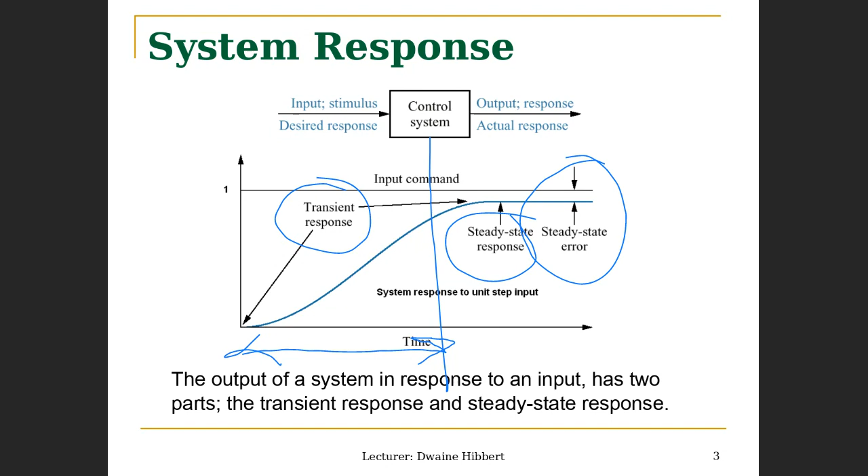Now, for us to appreciate and use system response, we have to understand that it is system response we use to describe the nature of a system. We describe the characteristics of that system based on how it will respond. We can use the model of the system to also characterize its response. So we can say, let us see how the system responds to a stimulus, and then from that response, we characterize it. Or we could look at its mathematical model, pick certain important parameters from that, and also characterize its behavior. So let us look, first of all, at the system response characteristics.

The performance characteristics of a control system are specified in terms of certain terms: the transient response terms and the steady state response terms. In particular, we look at the system response characteristics in terms of the response to a unit step input.

Yes, so all of these terms that we look at, we are looking at the system response specifically due to a unit step input.

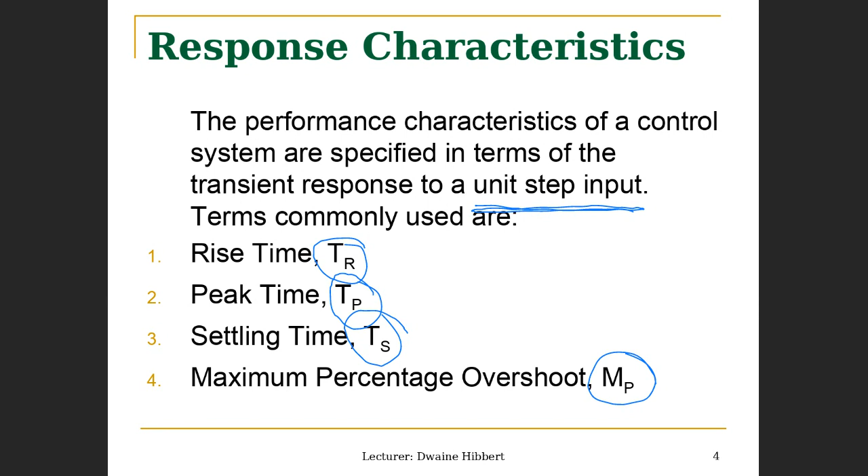Now let's define these terms. Start out with the rise time. Rise time is the time required for the response to move or rise from 10% to 90% of what we call steady state. In other words, that difference in time between the 10% and the 90% point of the journey to steady state is the term that is often described and used for the rise time.

Now, peak time, T subscript P, this is the time required for the response to reach the first peak of the overshoot, provided the system actually has an overshoot.

Now, for settling time, T subscript S, this is the time required for the response curve to reach and stay within a range about the final value. It is specified by an absolute percentage value, which could be 5% or 2%. Once it gets and stays within that percentage of the final value, we say it has settled. In some instances the value used is 5%, in other cases 2%.

In MATLAB, which you by now would be exposed to, when we derive step responses, MATLAB by default uses the 2% settling time. So that's the time it takes for the system to get within 2% of its final value and stay within that margin. That's the settling time.

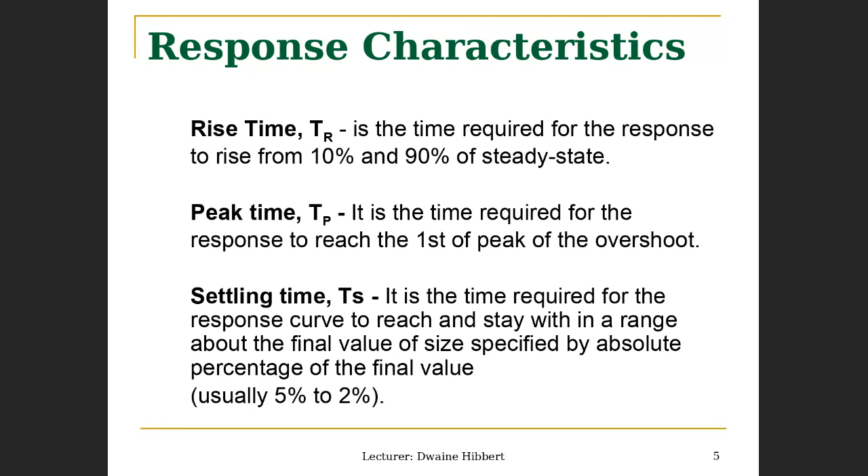Maximum percentage overshoot, M subscript P, this is the maximum peak value of the response curve, measured from the steady state value, and it is expressed as a percentage of the steady state value. How much did you exceed your steady state value? That is basically what we're saying, the maximum overshoot - the maximum point at which the system response went above the steady state value.

We're going to look at these terms - peak time, rise time, settling time, and so forth - in terms of two types of system response. We're going to start with the response of the first order system. What you're going to find is that the response of first order systems has a consistent shape, though it may vary slightly.

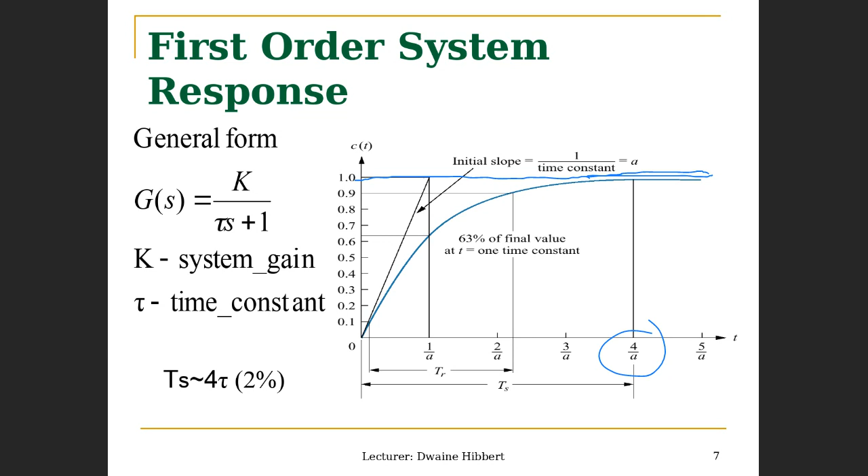So let's start with the rise time. The rise time here is defined between 10% and 90% of the final point. We're talking about the time between the two lower and upper limits. That's the rise time.

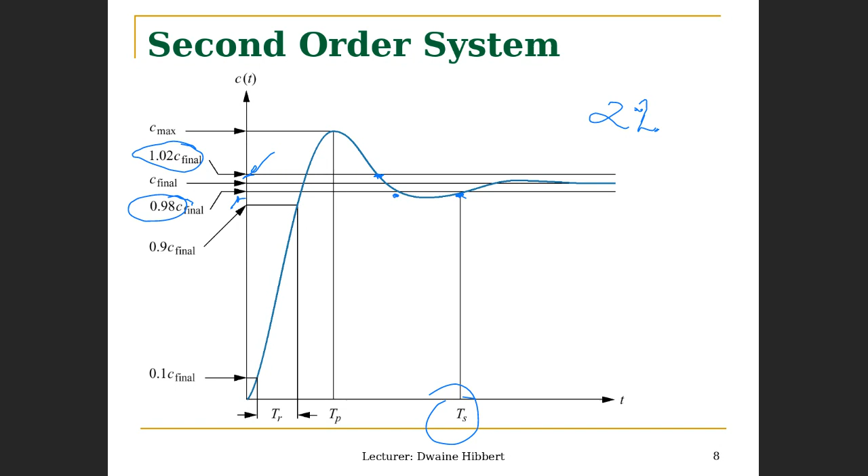Okay, go ahead with your question, Adams. I see your hand raised, Adams. Go ahead with your question. All right, we're not hearing Adams, so we're going to continue.

And the peak time is defined as pi over omega n times the root of 1 minus zeta squared. So these are just some of the formulas associated with the characteristic terms for a second order system.

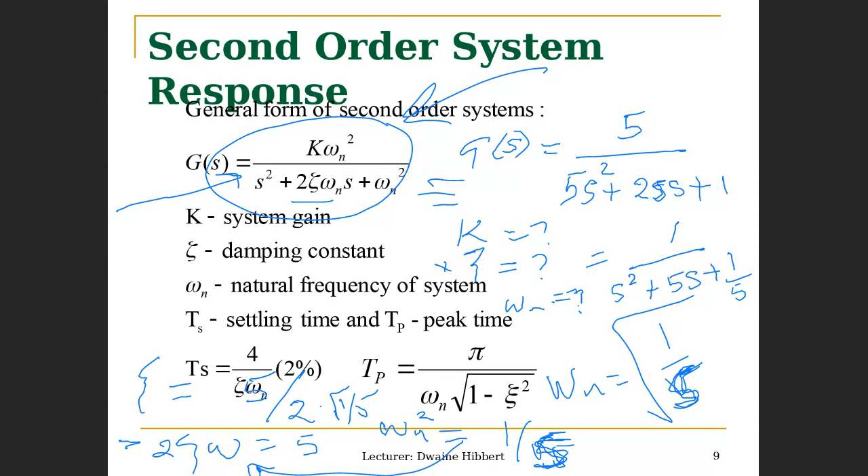So if you were now to determine the settling time, you would need to take that function and extract the terms of zeta and omega n. Then you'd be able to determine the settling time without actually seeing the actual response of the system.

We can do the same thing for the peak time. We could determine the peak time as well just by looking at the transfer function and extracting the pertinent or relevant coefficients or terms.

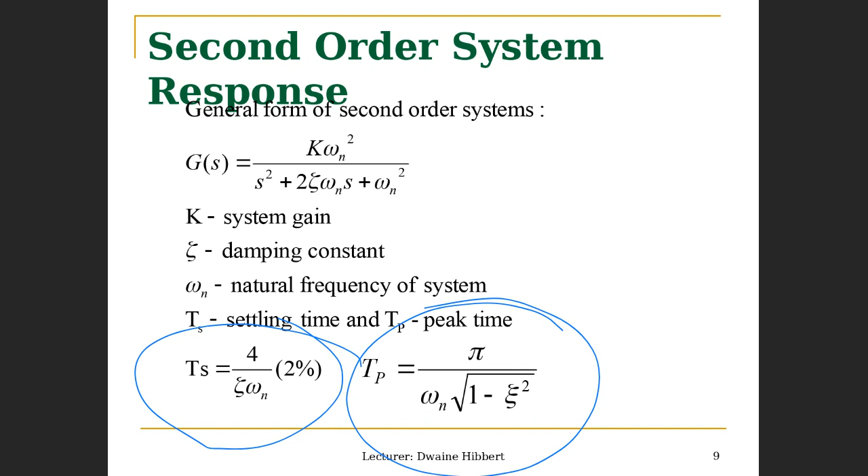All right, so let's continue. We're now moving on to system response, and we're trying to tie that into the whole reason for wanting to get a system response. Remember, we're talking about using models and simulation software.

Three important design objectives. Once you're going to design a control system, here are the three fundamental objectives that need to be met.

One, you need to produce a response that has minimum transient duration. You want to produce a desired transient response. That's the whole story. In summary, it shouldn't take forever; it should do so in the minimum time possible. That's what we call acceptable transient response.

Secondly, we want the system to settle with minimum error. We want to reduce steady state error to zero if possible. Now, in reality, it never ever goes to zero, it's as close as possible. So we would have our error maintained at the minimum possible, or the minimum suitable for the situation.

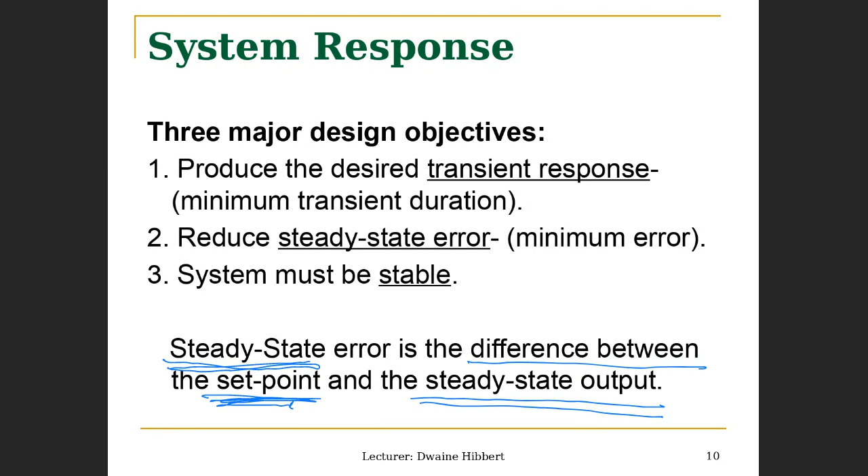So let's look at steady state error. We would have seen steady state error in that first response plot, which you may not remember, but that's fine. Steady state error is the difference between set point, where you desire or command the system to go, and where it actually goes, the steady state output. I should have a plot here to show that, but not yet.

A control system should respond to the input command. Remember, when you give the system a command, it should respond. The system should respond to an input, or respond to a disturbance. Remember, when you have a closed loop system, it should work to keep the controlled variable or output as close as possible to the set point.

So if it's maintaining the set point, let's say for argument's sake you're controlling a drone, and the drone is hovering, and you set it to hover at 100 feet above sea level, for argument, to keep it simple. That is what you set the set point to be. Now, if a gust of wind should disturb the drone, what would you expect?

Well, if it's a closed loop system... I'd expect the drone to return to its original position, or do the calculations to return to its original position. Yeah, it should attempt to do so, at minimum attempt to recover its original position. That's correct. So the drone should recognize that it's been disturbed from its desired position, and should now seek to regain that original set point. So it's responding not due to a new input command, but responding to a disturbance.

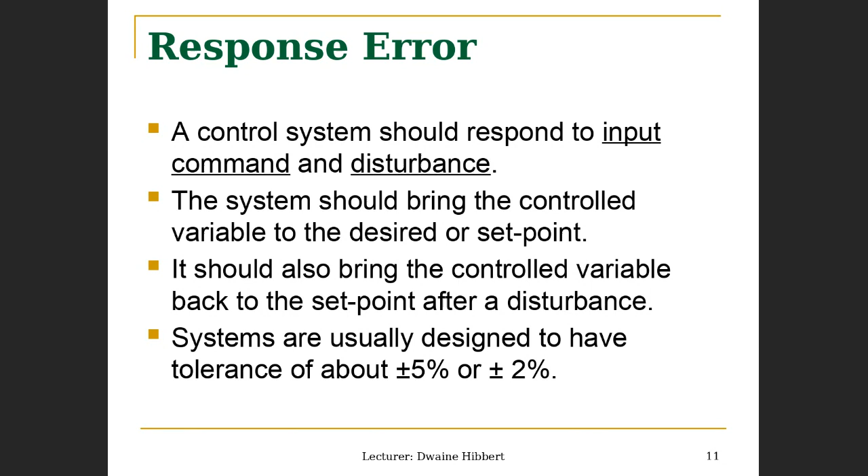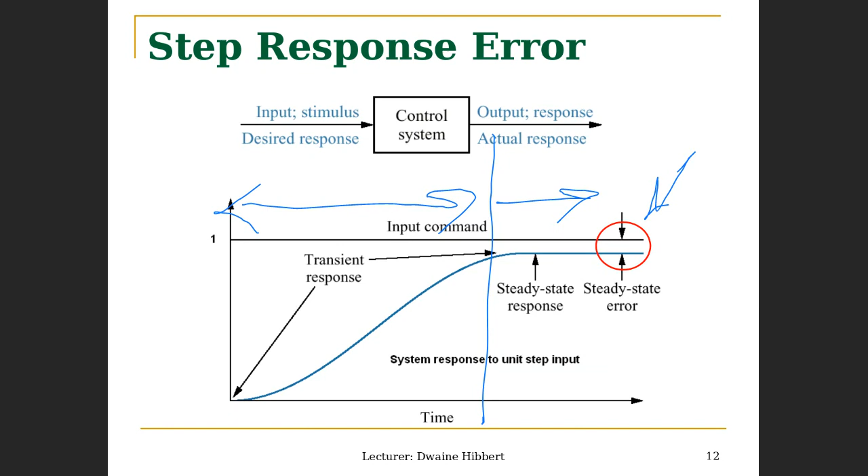We're now going to take a look at two important terms that help us to understand the behavior of control systems. Very important terms, and the terms you're going to look at are poles and zeros. Now we're going to define the term poles and zeros right now.

So the poles of a transfer function are the values of the Laplace transform variable s that cause the transfer function to become infinite. So any value of s that you can find, when you actually put it or substitute it in the transfer function, in so doing, if the system tends to infinity...

...then we refer to that value of s as a pole of the system. Now, for zeros, the zeros of a transfer function are the values of the Laplace transform variable s that cause the transfer function to become zero. Therefore, any value of s that you can find, that when you substitute that value into the transfer function becomes zero, then we refer to that value of s as a zero of the system.

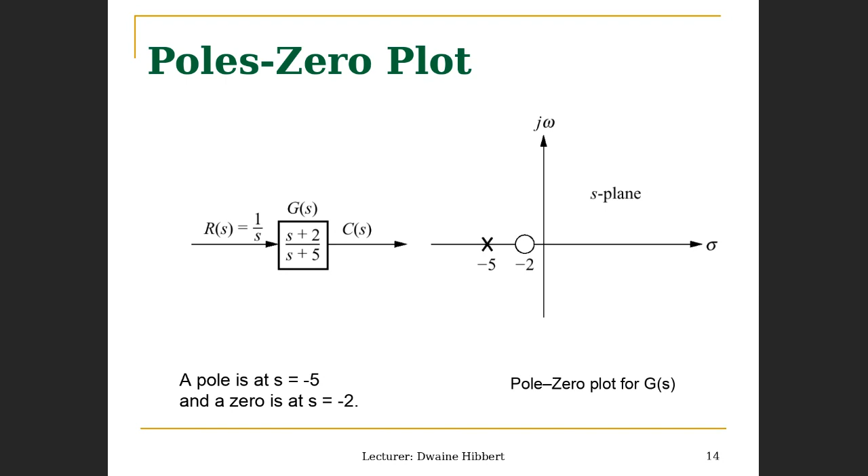Now let's discuss stability. We discussed stability in the first instance as being one of the design objectives. There are three design objectives: one, the system needs to respond timely; two, it needs to have minimum error; and third, it needs to be stable. If the system is not stable, you can't achieve that, to be frank.

So let's look at a simple definition for stability. A system is stable if a bounded input results in a bounded output. It's called BIBO stability - bounded input, bounded output. In other words, if you apply a finite input signal to your system, the system should respond with a finite output signal. If it does that, then the system is stable.

But you might ask, then how can you ever have an infinite output response? That's a very relevant question. But what we're going to see is that if the system tends or wants to attain infinity, then we define it as being infinite. We're going to see examples, a situation where the system is unstable, and you're going to see the system wanting to become as large as possibly can.

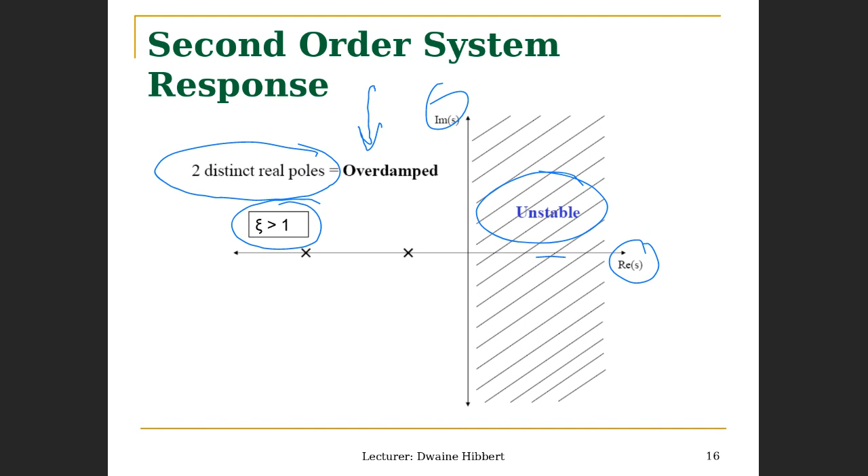So we've looked at two scenarios with distinct real poles only, where the system is overdamped, and the case where both poles are repeated with only real parts, so the system is critically damped and zeta equals 1.

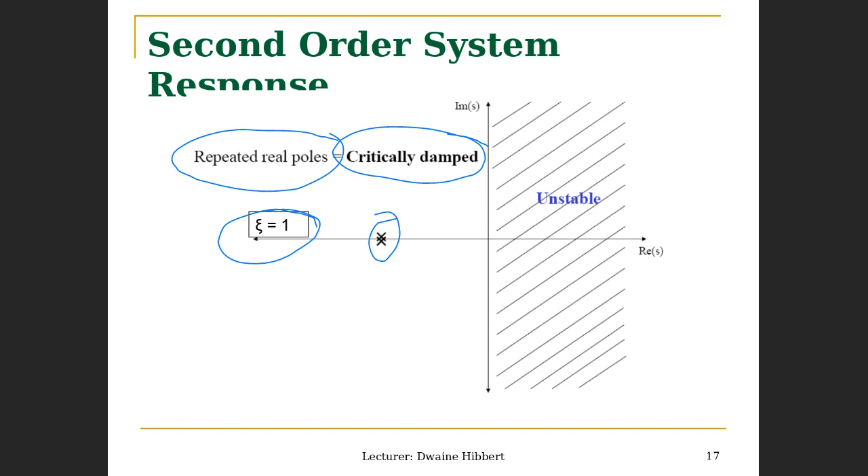So when we have poles with negative real parts that are complex poles, the system is termed underdamped.

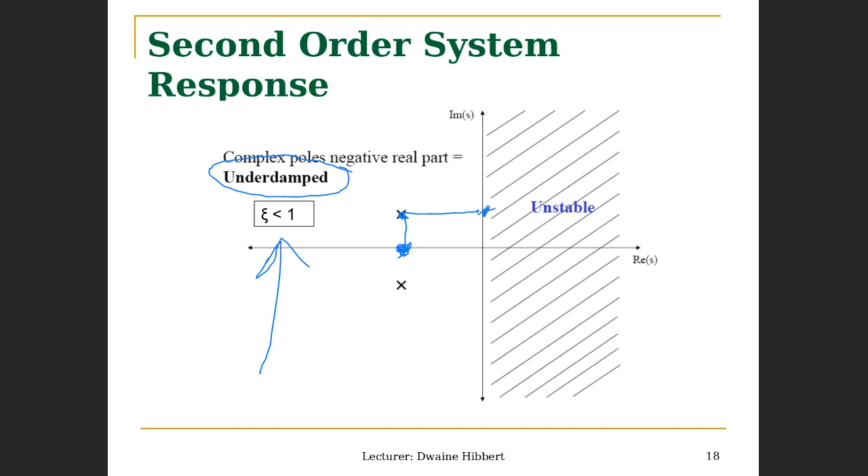Let's look at what happens when the system is underdamped in terms of the damping ratio: the damping is less than 1. As the damping goes down, the system becomes less damped, and we're going to see what happens to a system that becomes less damped. So we've just looked at three possible scenarios for a second order system: overdamped, critically damped, and underdamped.

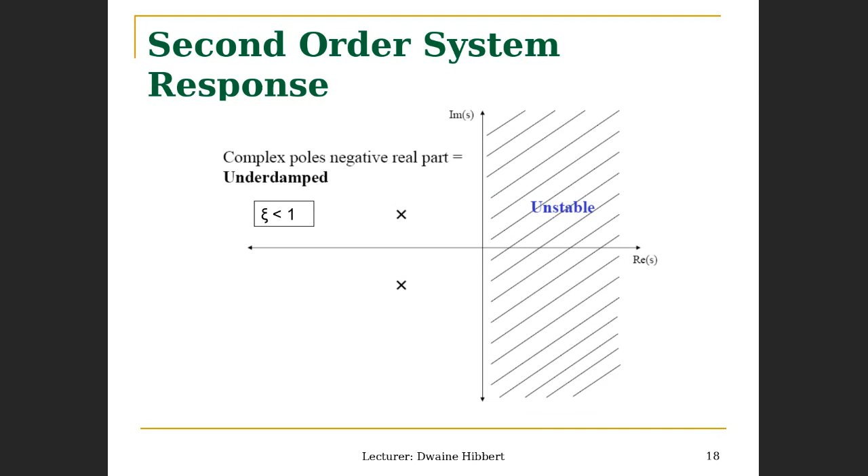So let's continue. Oh, my thing just went here. If my slide advances... all right, this... just confirm that you're still hearing me. Yes, sir, all right, so my slide decided to stay on this one. Yes, sir, all right, thank you. All right, I need my slide to advance. All right, so not doing it that way. I am going to do something because it's not advancing here. Let's come back to here. Really?

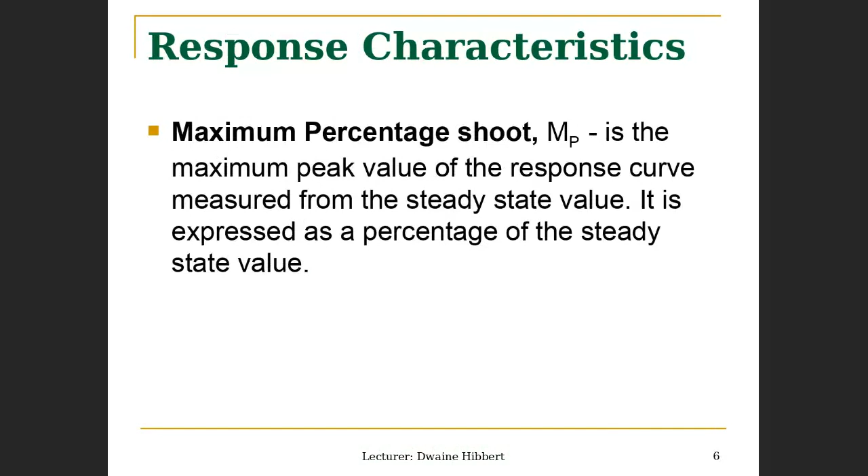Okay, so I lost my slide. I'm back here, all right, let's pick this back up. So, are we all good? Are you still hearing me? I see my slides back up now. Yes, sir. Good, so let's go back to where things got frozen, or just before that. All right.

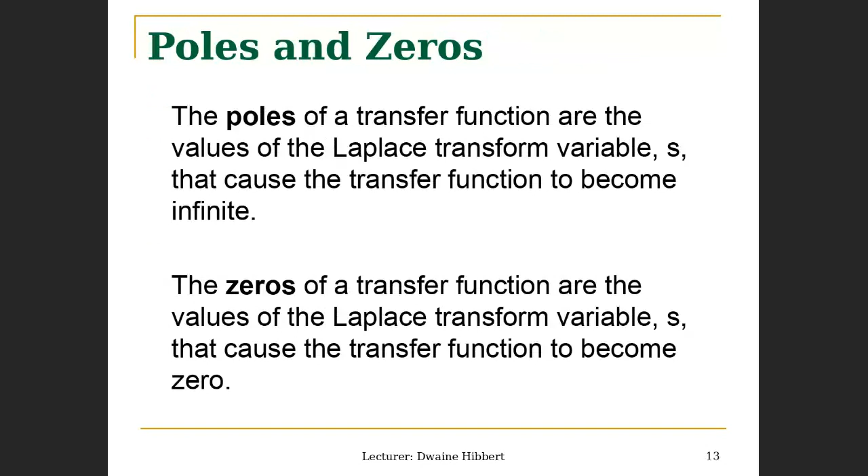All right, so here we're looking at the possibilities for the system. Now we're going to look at another possibility, and in control systems we don't consider this as something we want to have happen. This is not something we count as one of the things we would want to see happen, and this is what we call an undamped system.

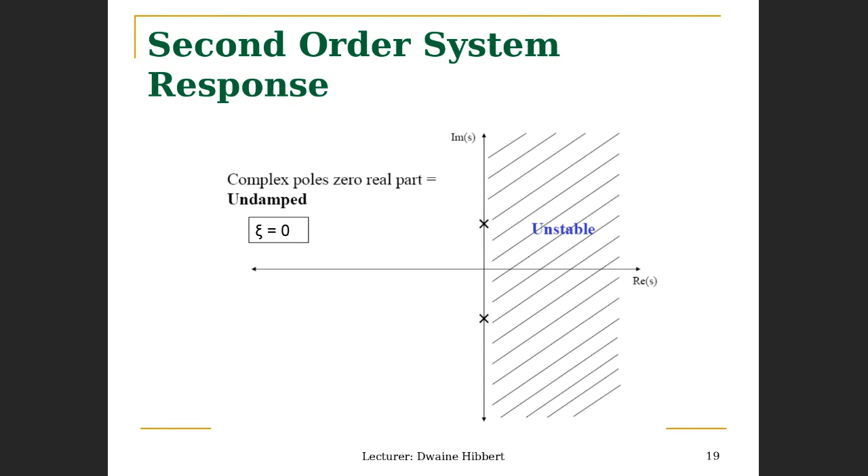So that's what happened that we don't want in control systems. There's no way we could accept that in a control system, unless you design an oscillator. It's not that we don't design oscillators, unless it's part of a control mechanism to keep the frequency of that oscillator constant.

We monitor the frequency of it. So what I'm doing here is to summarize the responses, and we would see the desired responses in the color—some kind of yellow orange.

Please don't chastise me on color appropriateness. Anyway, so I'm talking about being underdamped. Yes, and we're talking about being overdamped too. And in there we also have critically damped. So if I separate them: critically damped, overdamped.

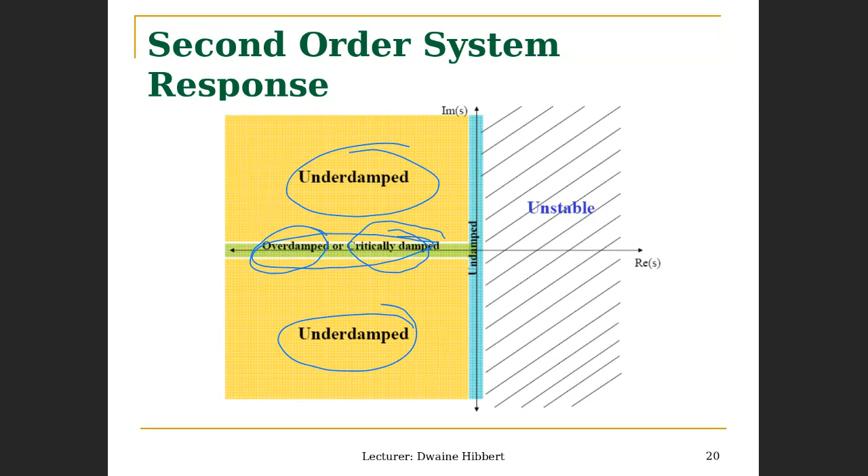So this is okay for us, but we don't want a situation that is undamped and unstable. We avoid being on the line, that is the imaginary axis. We avoid that altogether. That's unstable. We don't want that.

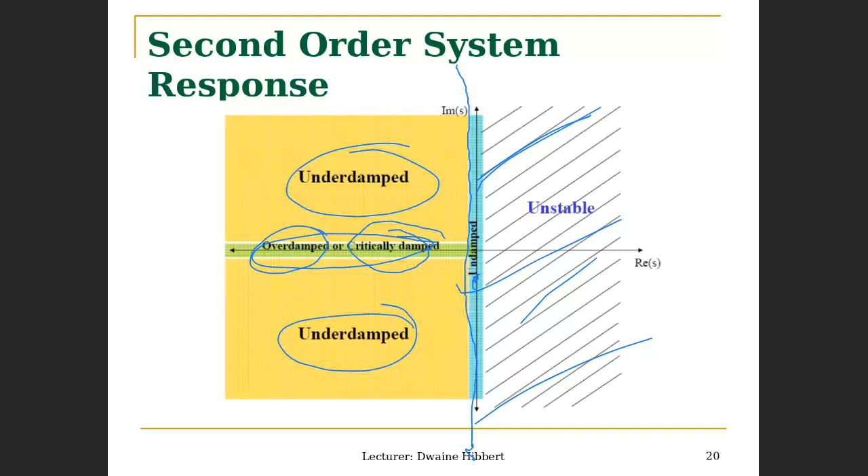Now here it is that I'm summarizing the responses of the second order system. So we have undamped—let's look at undamped, since that's the last thing we looked at. Undamped, and as you rightly said, it oscillates with constant amplitude. Once you stimulate that system, it's going to keep oscillating forever and ever, theoretically speaking.

In reality, there's no system that is totally without damping, as far as I know. So it will not stay in motion forever, but at some point it will eventually settle down. Let's think about a pendulum set to swing in air. It will swing there for some time, but the damping effect of air resistance is going to bring that pendulum to rest eventually. So it would swing back and forth, but as time progresses, the amplitude will diminish.

Let's look at underdamped. Underdamped is this one right here—we tend to mark on it. I'm going to draw another one for underdamped that could perhaps be more graphical. So it might look something like this. Underdamped: you have some oscillations taking place about the settling point.

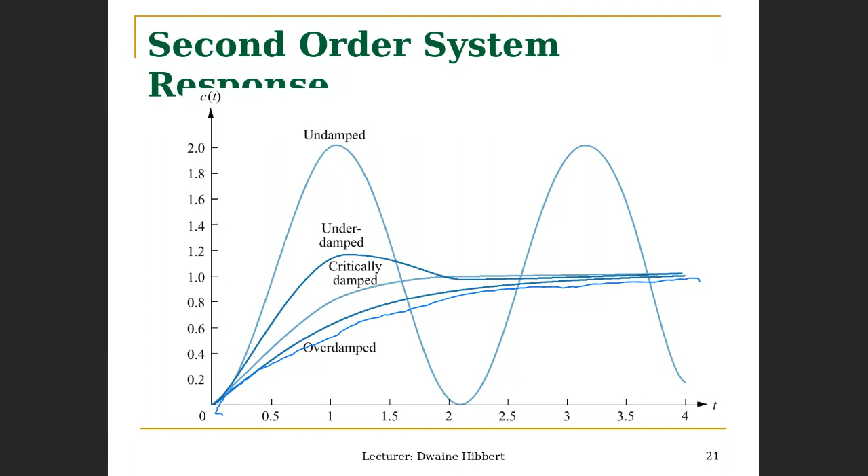Now let me see if you're listening to me. Can a first order system oscillate? Can a first order system oscillate? No, sir, it cannot oscillate. Any particular reason?

Well, it behaves like critically damped, sir. Okay. Well, even though we term critically damped only for second order and systems above second order, a first order system cannot exhibit oscillatory behavior due to the nature of its transfer function. All first order systems look the same way—like the charging of a capacitor—and therefore we don't expect any oscillations.

So you're quite right that it has a shape similar to a critically damped or overdamped system. But let me explain something—I'm glad you raised that point. For a first order system, the response will typically look like this. I'm going to mark on the screen here. It will look like this. Note, put your attention here, okay?

In a system higher than first order, you're going to have a lag, a delay, and then it's going to do this—so this is what distinguishes it. If you look at a system response that resembles a first order system, take a look at the initial point. If it's moving with a very sharp gradient, then it's first order. If it has a lag, like what we're seeing here, this slowness—I'm trying not to use the word lag because I didn't define lag.

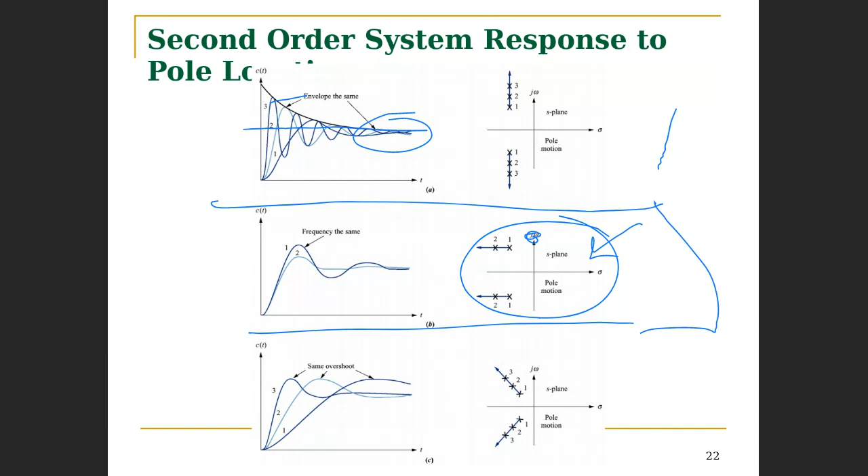Having said that, though, anything you want to say about this response apart from what you already said? No, sir. All right, thank you for that feedback.

I think there was a hand raised. Who was it? It's probably not seeing that anymore. By the way, anybody want to share what they are observing here? Because what we're establishing here is the effects of the pole on the system response. Go ahead, Jordan.

I'm not hearing Jordan at all. Oh, sorry sir, you hear me now sir? Yes, go ahead please. So the further away you go from the pole to the left, the more stable the system. Let's get something clear, let's get something clear.

The further you go away from where? So the further away you go from the imaginary axis to the left, sir, I would say you have a shorter settling time.

Absolutely. And how do you determine that, by the way? Sir, because of where pole one is and where pole two is, from the diagram on the left, sir, you can see that two settles before one. All right, good, that's a very good observation.

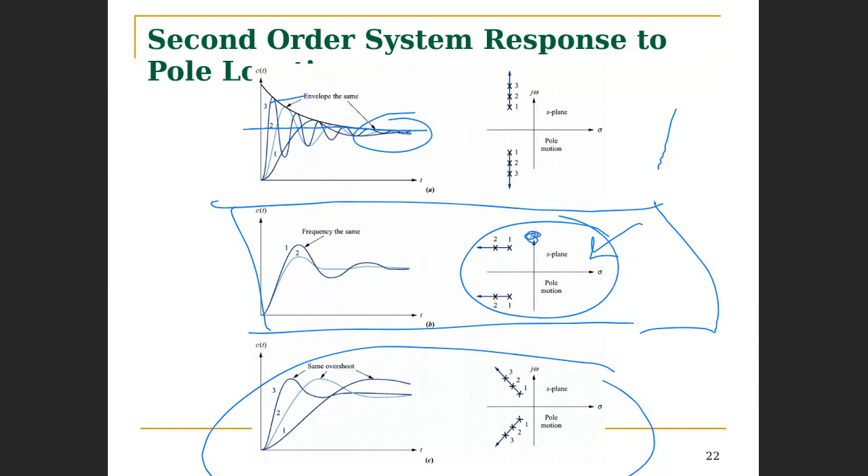Now the third is a summary of the first two. You're increasing in complex part as well as increasing in real part, and you can see the two are combined. So it will have increased oscillations, however, it will settle faster. That's basically summarizing the effects of the poles and their position.

All right, we're going to seek to close off with another stability assessment here using the Routh-Hurwitz stability method. What is posed here is that when we have a system, and if the order of the characteristic equation is greater than 4, meaning the polynomial is of order higher than 4, it's going to be really difficult for us to determine the roots and make this assessment. As I said before, by examining the position of the poles, you can say this system is going to exhibit this behavior, that behavior, and so forth. Once you get above fourth order, it becomes difficult to extract roots by hand.

And as I've said to you before, in today's time and age, we have software that can easily compute these roots, all right?

Easily compute the root. I'm going to be frank with you, this is just mere academics, just to appreciate the analysis tools. But the truth is, you never use this tool. I can't see any reason for you to use this tool going forward when you have apps on your phone and software that can compute these.

That said, let us move into what this Routh-Hurwitz stability thing is. This is what they'd have used in earlier times without these high computational computers. The work of Routh in 1905 and Hurwitz in 1875 - these are two independent researchers, two independent scientists. They combined the work, and it gives us a method to determine the presence and the number of unstable roots.

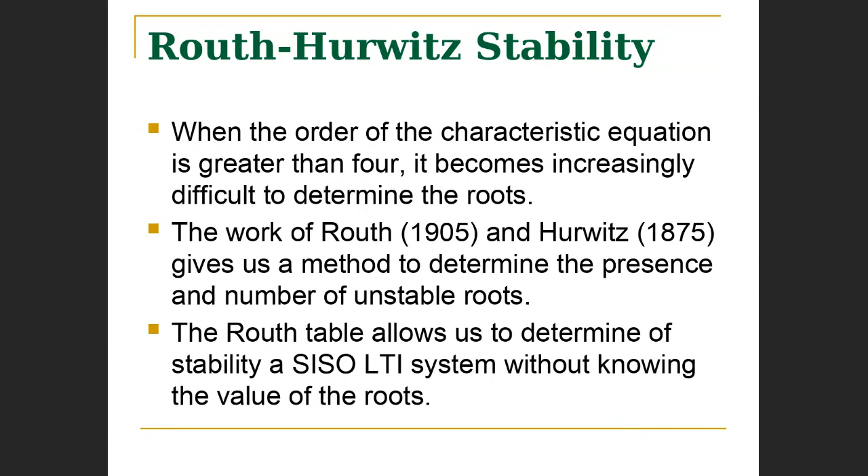The Routh table allows us to determine the stability of a single input, single output linear time invariant system without knowing the roots. So we can actually determine how many roots are in violation, that is, how many roots are on the right-hand side of the imaginary axis, and we can obviously tell if it's unstable. That's what this Routh table is going to do for us.

Here's the criterion. A necessary and sufficient condition for stability is that all elements of the first column of the Routh table be positive. That's simple. Now, the number of roots with positive real parts is equal to the number of sign changes in the first column of the Routh table.

Let's go again. The number of roots with positive real parts, the number of roots that are on the right-hand side of the imaginary axis, is equal to the number of sign changes in the first column of the Routh table. All right, let's see how we establish this.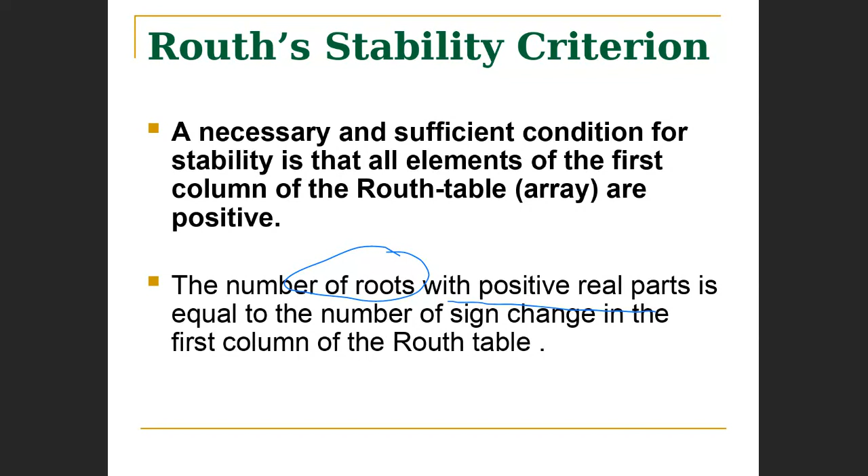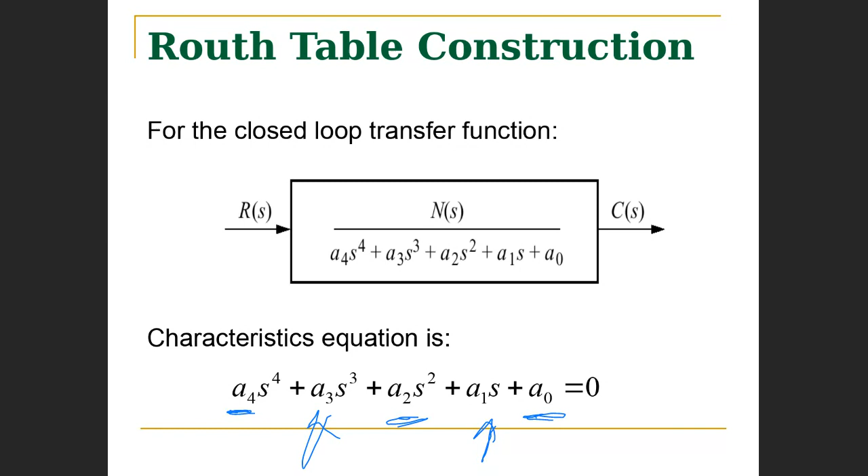So we're going to take the elements for the first row, and here's how we do it: this one, go to s to the 2 here, s to the 0, which is here. So a4, a2, and a0 would form the elements in the first row. The next row now would consist of a3, a1, and 0 - or we could just keep it like that. Let's look at what happens next. So you see it here: a4, a2, a0, a3, a1, 0. All right, so we have just established the first two rows in our Routh table.

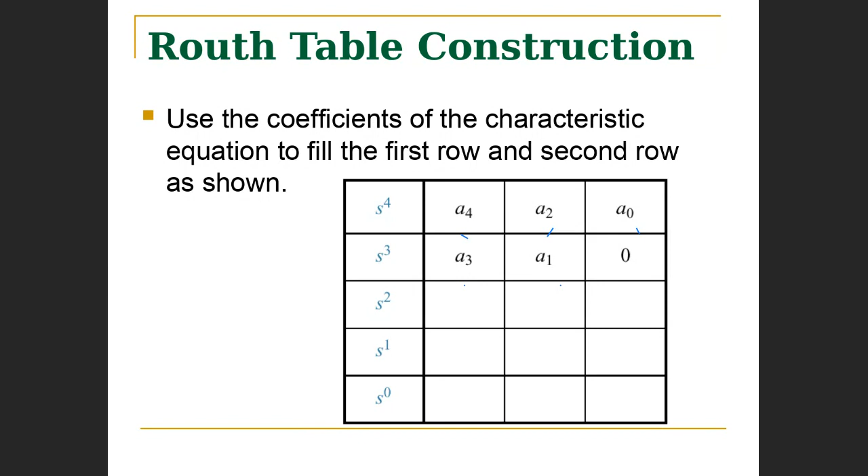Interesting, I won't repeat what Travis just texted. Anybody can just, let's take it in part. We're talking about right here. What does this mean? Nobody?

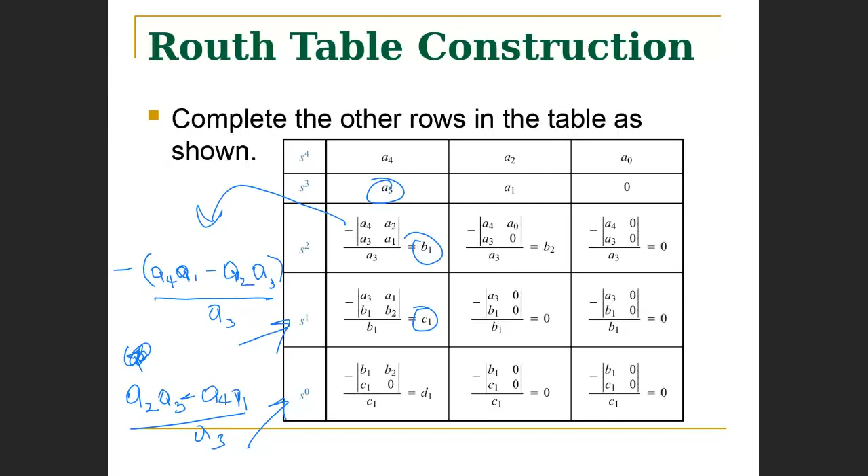So if you look at this row here, what are we dividing by? B1, all throughout by B1. For here, what are we dividing by? All terms by C1. So we're going to attempt to do this, and we're going to take our time to establish the rules to do this. All right, so we're doing a Routh table.

So the first aspect shouldn't be difficult for you - that is how you select the elements in the first two rows. So we should be able to do that. Anybody having difficulty establishing the elements in the first two rows? No, sir. All right, so one person - out the door.

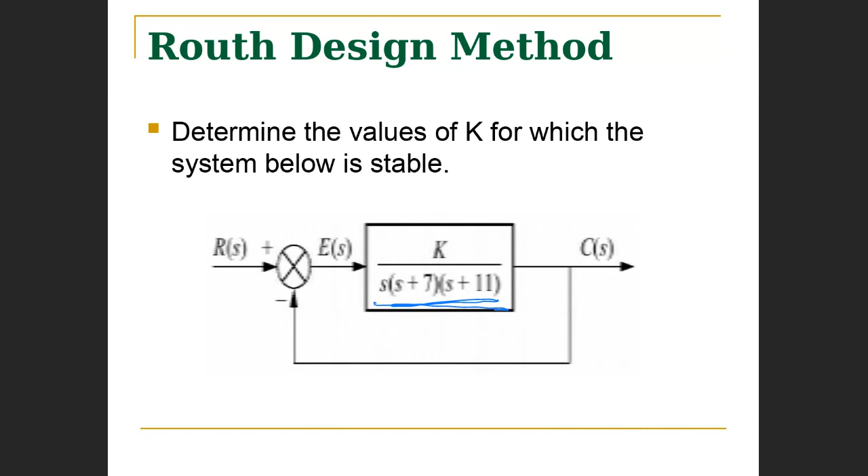So you should be practicing. All right, I'll speak about the assessment after, in a few. So I'm going to put that aside and go to the discussion of that.

Now here is the fun part, where you now need to populate the rows below it. Now this is a very simple polynomial - it's a third order polynomial. It could be a fifth order, it could be a 6, 7, 8, 9, and so on, but it's simple, third order. So what is wrong, sir?

The minus sign missing. From what? S1? Yeah, the first one. All right, we're going to see, we're going to see. It's a possibility - you know, like everybody else, I can too make errors. So let us see if I'm in fact having an error there. So we have - do you agree that the first two rows are populated correctly?

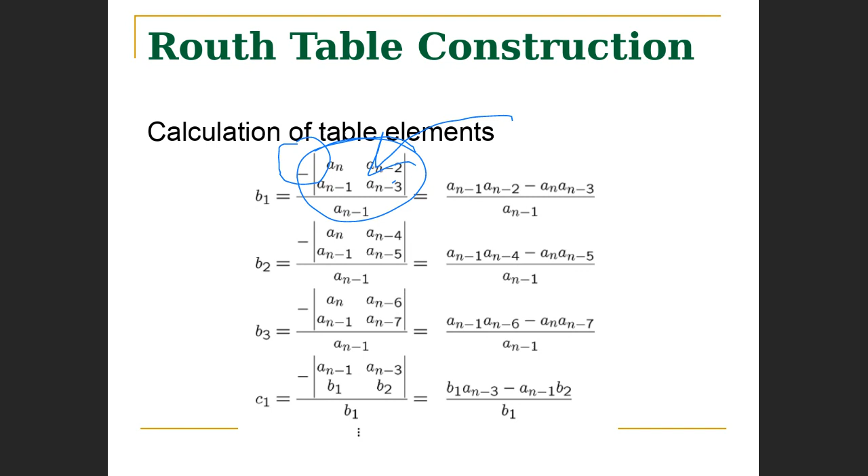You're going to multiply the leading diagonal and then minus the opposing diagonal, right? Correct. Now, the opposite way, which means to subtract the opposing diagonal from the leading diagonal, it's the same story. So instead of me explaining how we derive or what this means mathematically speaking, I was saying in all the subsequent explanations - and you can go back and look at it in the video, right?

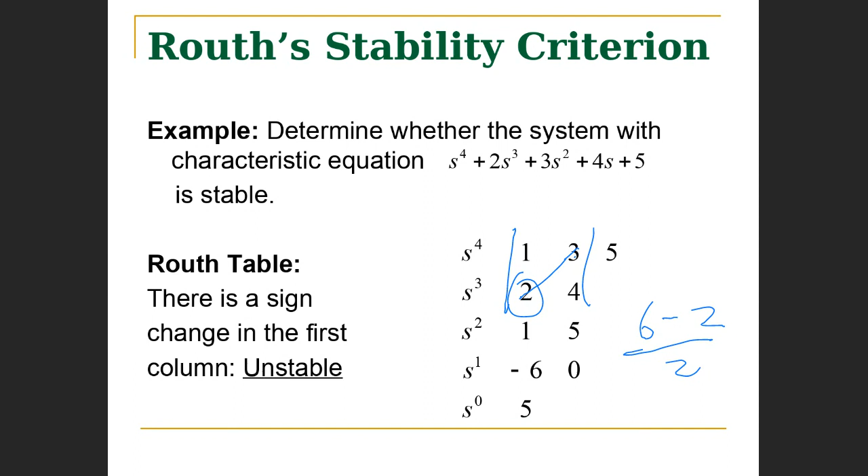So come here now, we're doing it. Again, I'm saying if you do it the way that you're comfortable with, if you can appreciate what that means, I'm just using what at this point would be best if you don't appreciate what the term A, B, C, D means. Simple mathematical term, but I don't wish to teach that right now. But I could say to you, whenever you have your polynomial, if you have your table, just simply do this.

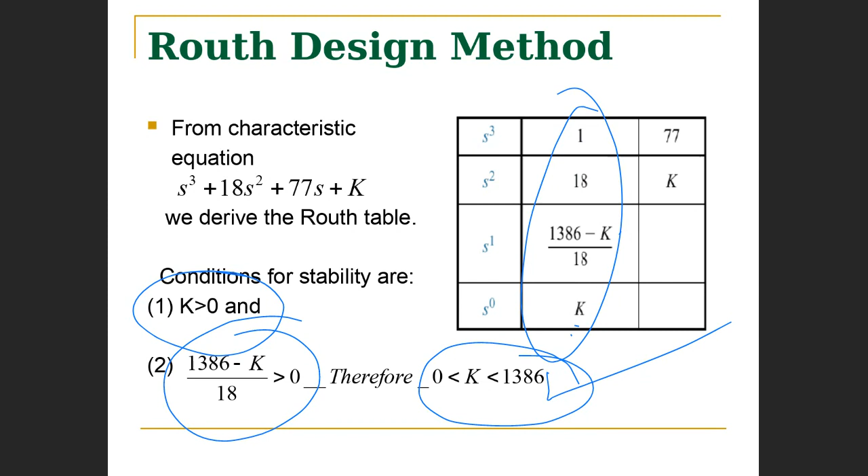All right, so you're required to do analysis of systems using the Routh table. All right, so any questions at this moment? We're going to close off.